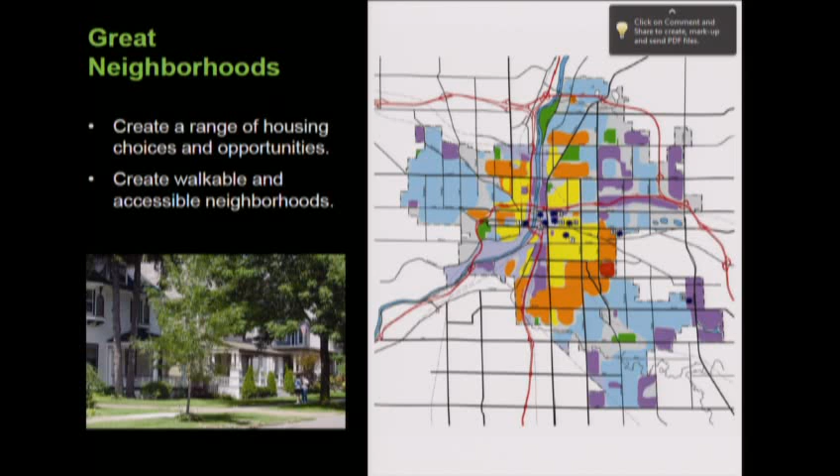So it's pretty interesting. Our plan is based off of 7 themes. Great neighborhoods is one of those. And I'm just going to flip through because the bullets at the bottom are basically a reiteration of smart growth principles. So great neighborhoods, vital business districts that we have a mix of land uses and strong sense of place.

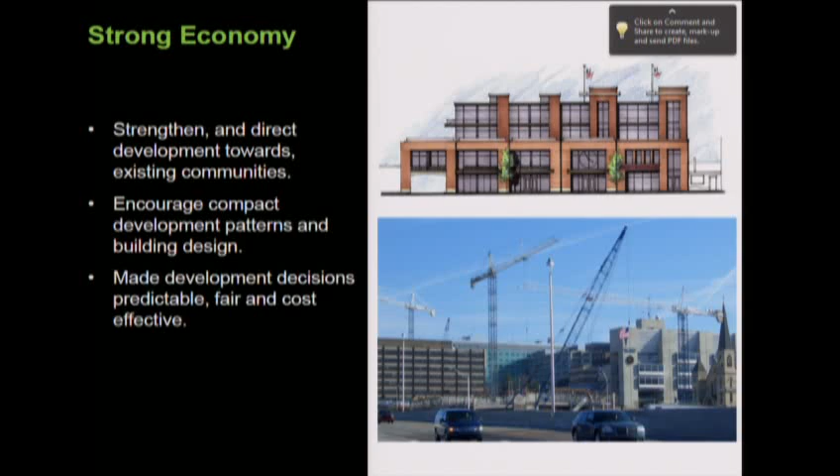Strong economy, and the strong economy is very interesting because you're trying to balance institutional and industrial growth with neighborhoods, and kind of how do you allow for that growth to happen and keep that quality of life that you want to maintain. Balanced transportation, again, that variety of transportation choices came out strongly whenever we've done any planning process.

A city that enriches our lives, so the quality of life piece is very important. City in balance with nature. And when we get further into development, we particularly talk about stormwater and how do you manage urban stormwater, because that is a huge issue.

And if you're into the green buildings, we talk about green roofs, or how do you do rain gardens, and you do that stormwater management. That's a huge piece in development that we have to continually address, and it can be very expensive for developers. And partnerships, again, that theme of working together.

Our future land use map is our basis for decision making when we look at kind of what the development patterns of the city should be. The red dots that you see on the map actually are transit-oriented development nodes. And we took the map from the Rapid, their whole bus map, and overlaid that with our land use map and identified key commercial areas and nodes so we know where to focus heavy development.

In particular, if you look at Division, where the new Silver Line is going to come, the bus rapid transit system, the BRT is going to be the first one in the state of Michigan. It started in 2014, where we actually have physical built stations that you pay before you board, and the platforms are built right up to where the bus will come right up, and you can roll your bike or stroller or wheelchair right onto the bus. All the doors open at once. The typical wait time at the station is 14 seconds, and they're off.

The neighborhood pattern book was a way that we looked at the community through years of development. When were these neighborhoods built, and what was the range that seemed to fit from, they were distinct enough we could create different zone districts out of. We actually ended up with 3 different neighborhood types, and that became the foundation of our zoning ordinance. So if you've already looked at the zoning ordinance, that's really how it happened.

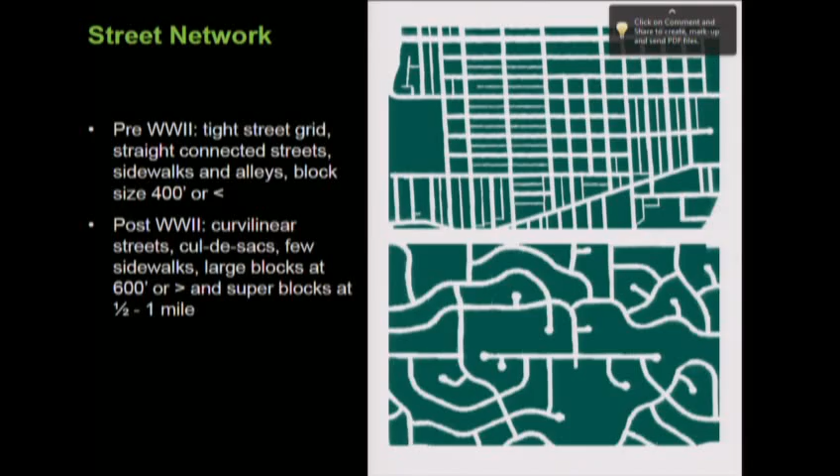Our street network really has 3 major street types, but the big 2 distinctions are pre-World War II and post-World War II. I can go on about streets all day, especially talking about sustainability, healthcare, and all the things that go wrong when you don't do streets right. But before World War II, we developed in a street grid pattern, with typical street block lengths of 400 feet - very predictable, very integrated. It was a whole network.

After World War II, we started to separate our land uses apart, build bigger roads, have them less connected. You saw more cul-de-sacs, to the point where a typical block length now to get around the block could be a half mile or a mile. If you're familiar with township development, built on those mile roads, you'll typically see a square mile with cul-de-sacs all coming in off of that, but all the traffic dumps onto one street. When you get further out of the city, you could close the S-curve downtown and nobody really knew where all the traffic went because it could disperse into the whole grid system - there's multiple ways to go. But if you did that to the East Beltline, where would the traffic go? There's not that connectivity, not that variety of choice in location and how to get there.

That has public health impacts actually, because you're forced to drive in this newer street pattern since you really can't connect to anything. You don't have any way to walk a block to get to something - you have to drive to get there. Actually, if you live in the more urban environment with the street grid, you're supposed to be 7 pounds less - little happy tip for all of you - because you're more likely to walk in a grid system than in a suburban road system. Fatalities are also less with that street type because your travel speeds are lower, and there's just a lot of different benefits.

From a land use pattern standpoint, the same thing applies. This is the same square mile - a traditional neighborhood on the left, that's the uptown neighborhood with Fulton, Cherry, and Wealthy. The other picture on the right is 44th Street.

You can see again this pattern of what we used to do, which is mix these land uses. The yellow is residential, the brown is multifamily, the red is commercial, the blue is office. You can see how walkable it is, maybe a 10 to 15 minute walk to get to a shop or restaurant in this traditional pattern, versus being out on 44th Street or further out, where you're walking a mile to get anywhere.

And you might, if you're lucky, have a sidewalk to be on. You usually don't see sidewalks in the newer forms of development. Because all the traffic pours onto one central street, your traffic volumes are exponentially higher. Instead of maybe 10,000 cars on a street, which is still busy in the city, you might see 25,000 cars. Then you need a bigger street, and you're not comfortable as a pedestrian being out there, so you're less likely to be out and about walking.

For residential development, we looked at building placement, setback, and the character of that development. Does it have porches? Where's the garage? That was a big issue for us, because in modern development you might see the garage at the front of the house, while in traditional neighborhoods the garage is in the back. So how do we regulate parking, and where does all of that fit?

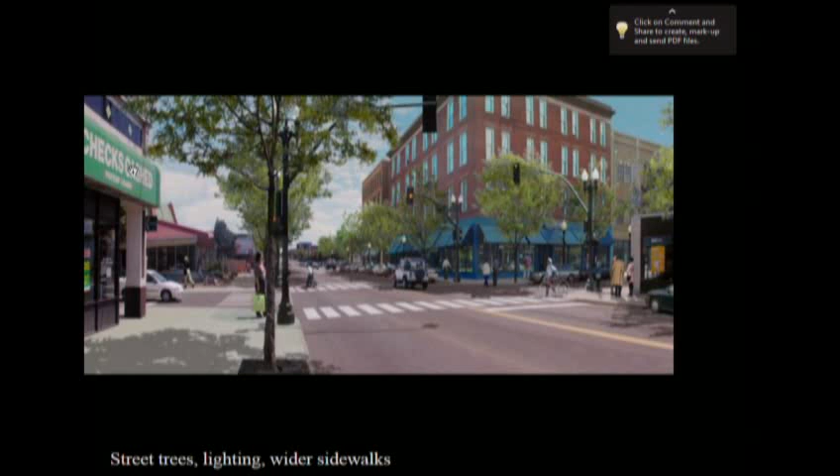So just really quickly: where do you place the building? How do you treat the street? How do you make this a place where people want to be, live, and enjoy commerce? You can fill in all those voids as you go through, and now you've created a completely different place. When we did the pattern book, that was really the vision set forth by the community, and that resulted in the zoning ordinance.

We took that foundation of smart growth and brought it into the zoning code. So how do we provide for a range of incomes so people have choices? How do we provide for a range of transportation types?

If you don't have a car—and a third of the population doesn't drive, an interesting little tidbit—too old, too young, disabled, by choice, or for legal reasons, you can't drive. A third of the population. What's interesting is that when seniors are surveyed about their biggest fears, the AARP has found it's not dying they're most afraid of, it's the loss of their car keys—that you're going to take away their mobility, they cannot connect to the community, they're stranded at home, they can't drive. So how do you provide for this range of transportation types?

How do you make sure you're being environmentally sound and managing stormwater properly? Those were the foundations of the zoning ordinance. We also followed LEED-ND, LEED for neighborhood development, which I'll talk about. The transit-oriented development I already mentioned with the red nodes corresponds with the Rapid's master plan.

We also use crime prevention through environmental design, where you can create physical spaces that automatically deter crime just by the way you build or place the building, or how you've defined those edges.

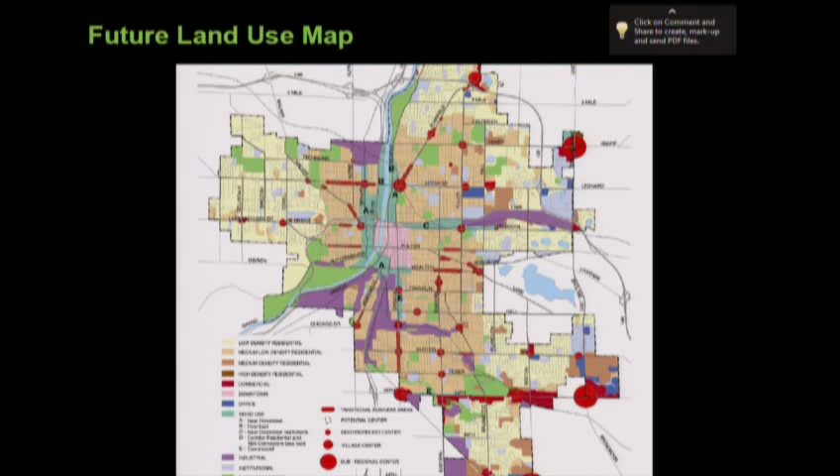I'll mention the future land use map again, because when you talk about smart location and linkage, how are we connecting and creating these nodes and making sure we're maintaining a street grid system so you have those connections? For design, when we talk about walkability and encouraging people to walk and get out of their cars, when you look at buildings like this with no windows, how comfortable are you really walking by that space versus a newer building with great windows?

I mentioned crime prevention through environmental design earlier, and there's this whole theory with CPTED - one of the key principles is surveillance. What 7-Eleven found when they kept getting held up as a party store is that if you have clear glass windows and feel like you might be watched - somebody could see you inside the store, or you could look out in the parking lot and somebody could see you - that it's a natural crime deterrent.

When you look at all the new development happening in Grand Rapids, be it the Walgreens at Michigan and Fuller, or Miss Tracy's on Franklin Street, or we're going to have another Walgreens over on Leonard, you'll see that we require 60% transparency, lots of glass on these buildings, because it's a natural deterrent for crime, but it also creates a much more walkable environment for pedestrians.

If you look at a shopping mall, for example, if you're at Woodland Mall walking from Sears to Penney's, imagine if half of those storefronts were all boarded up. Would you really walk from Sears to Penney's, or would you go to your car and drive around to the next location? You probably would drive. The same principle applies to urban environments - trying to keep the continuity, the storefronts, the street wall, so people are comfortable walking.

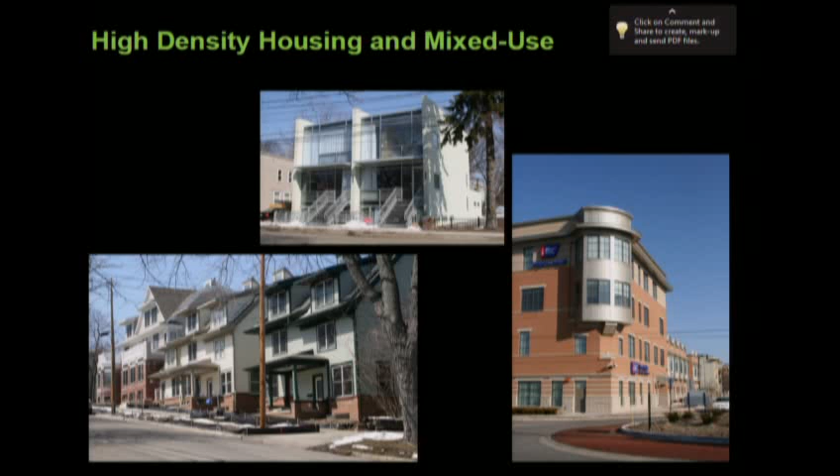You also have examples with the roundabout on the lower right-hand corner, St. Mary's Hope Lodge for people dealing with cancer. So we're seeing that pattern now developing. It's been really fun to have the zoning ordinance adopted, and 5 years later starting to see all the buildings coming in that are meeting the code.

We also have a new Subway being built on South Division, and a new Subway being built on West Fulton, where they're starting to put them at the street. The Riley's Ace Hardware on Michigan, and I mentioned the Walgreens - so you're starting to see how this pattern is developing, and as projects come in, big box stores, if they really want to be there, they will comply.

They're figuring out new models. Actually, the new Walgreens store we're going to have on Leonard - they're saying it's a new prototype for Walgreens to try to meet zoning ordinances similar to ours. So we're the first one. We thought that was kind of cool.

Ways in which we've kind of tried to reduce impervious surface to be more green. Parking is a huge issue, especially if you're talking about these seas of asphalt and parking lots. How do you incentivize less parking when you don't plan for Christmas peak twice a year, and the rest of the time half the parking lot's empty?

So our zoning ordinance actually has a maximum parking requirement. We typically end up waiving it. The Planning Commission hasn't quite gotten to the point where... most people we find are providing the parking they think they need, but they're also not being overly aggressive in how much parking they want to provide.

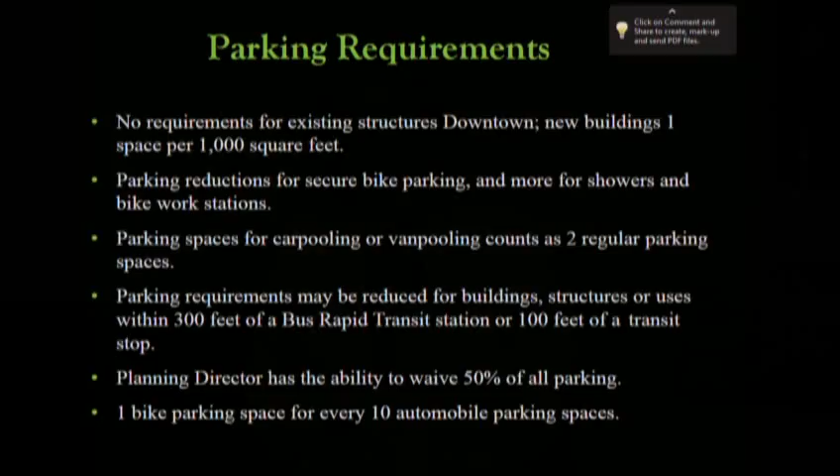I also have the ability as the planning director to waive parking, and the American Planning Association actually uses our ordinance as an example of the different things you can do. I can reduce parking requirements by half if there's transit nearby, if there's shared parking, if they provide additional bicycle parking, or on-street parking. There are different ways people can provide parking, and we're very flexible about that.

That's a big paradigm shift for a community to go through, because for years retailers were tied to this parking ratio, and so were community leaders who felt they had to provide this much parking. You may have followed the recent debate on Cherry Street about a new sushi restaurant going in with no parking being provided, and they're adding 75 more seats, so parking is already starting to get a little congested.

Should there be metered parking on the street? There's no municipal lot. Should we build one? The answer is going to be no.

But you want a healthy, vibrant community, and having people walk a block or two isn't going to kill them. At the same time, you've got to build a very walkable environment where they're comfortable doing it. If you go to downtown Chicago, before you know it you've walked two miles because it's such an engaging environment. How do you create that in a city the size of Grand Rapids, in our neighborhood business districts, so you can walk 3 or 4 blocks and not feel like it took forever? All of this ties together.

I mentioned the bike parking that we require. We also require—oh, this is cool, I can switch back and forth with the roller.

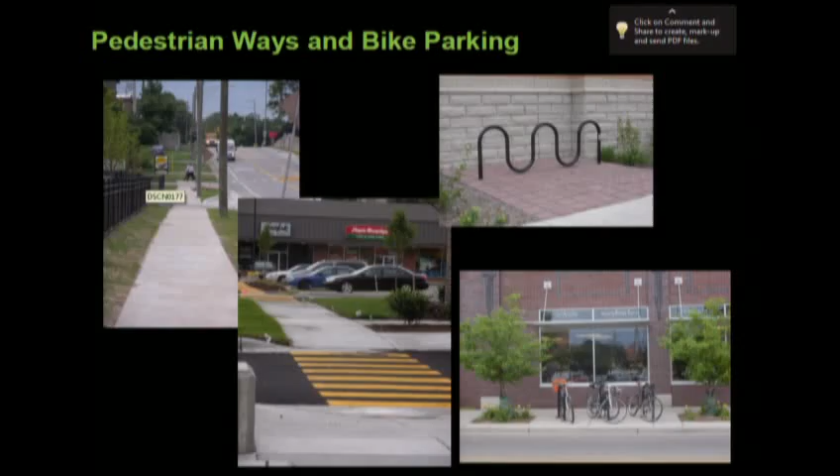The other piece, which you'll see more at Michigan and Fuller, Walgreens has it too, is the connection of the sidewalks. I mentioned people who are sight impaired, if they can't find the front door, how do you provide a path for them to safely cross a parking lot? So we require that all the connections, even if the building's not right at the street, connect to the public way, and that it's logical, fits, and is convenient for people.

For green requirements, we allow porous pavement for green space reductions. We took a different approach when we did the zoning code. Typical codes will have an impervious surface requirement, but pervious surfaces now can include porous asphalt or porous concrete, which isn't really green—it manages stormwater but isn't green. So to encourage people to change how they manage stormwater, we put a green space requirement in, not too aggressive that people feel they have to tear down the building next door to provide lawn, but enough that you can meet those requirements with porous asphalt, porous concrete, or a green roof.

We even allow contributions toward the Kent County biosolids facility—it's the plant that takes biosolids from the sewage treatment plant and repurposes them. They dry it out, use it as fertilizer on farmland, and buy easements on farmland to dispose of the biosolids. So we allow contributions into that to help fund acquisition of those easements, and you can get credits through that.

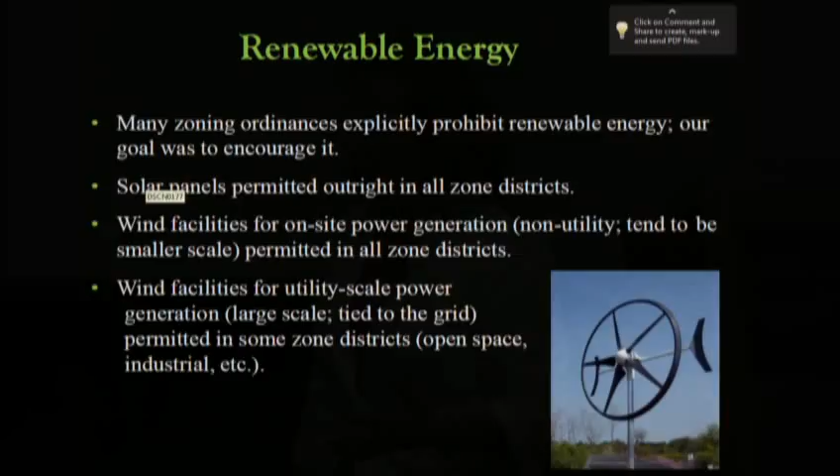For renewable energy, we allow solar panels and smaller wind turbines. We looked for opportunities to allow larger wind facilities in the city, predominantly in industrial areas. There are a lot of considerations with those larger facilities, everything from shadow flicker to noise to how you manage that, but we've opened up that opportunity in our zoning code so we can do more alternative energy.

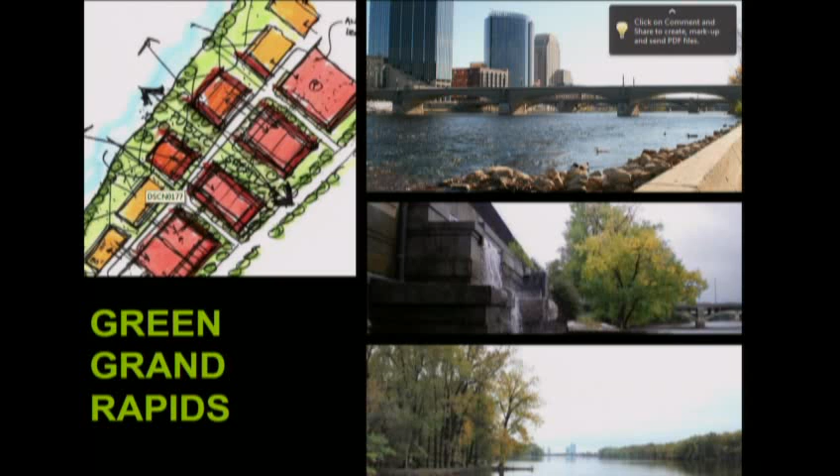I wanted to highlight what we've been doing in Grand Rapids because this was an update to the master plan. I mentioned the three themes, or you saw the seven themes, but the three we focused on heavily in Grand Rapids were balanced transportation, a city that enriches our lives related to quality of life, and a city in balance with nature related to natural features.

A lot of this planning, starting in 2007, resulted from different pressures. The city has historically had a partnership with Grand Rapids Public Schools allowing us to share facilities—a joint use of facilities agreement. GRPS, as they've been downsizing, have been trying to dispose of their properties. In most of our neighborhoods the parkland is owned by the school—25% of our parkland is under GRPS ownership. As they dispose of that property, it substantially affects quality of life in our neighborhoods.

You may have heard of the partnership the city has been doing with Ojibwe Development for Eastern and Lexington schools. Oakdale had an interesting twist—we're working with the charter school there to preserve an acre of land as public park, which they're actually donating to the city so it's in public ownership, which is great. I mentioned the emerald ash borer, and we were also getting a ton of requests for bike lanes—everywhere you go, everybody wanted bike lanes.

That was the number one vote getter when we went through the process.

Stormwater management, as I mentioned, but also shrinking city resources. How do we ensure quality of life for our citizens, but we have to do it in a different way. We can't subsidize our Parks Department anymore. The budget for the Parks Department has been cut by two-thirds. So how do you still provide a high quality of life for citizens when you don't have a lot of resources, and how do we creatively think about that?

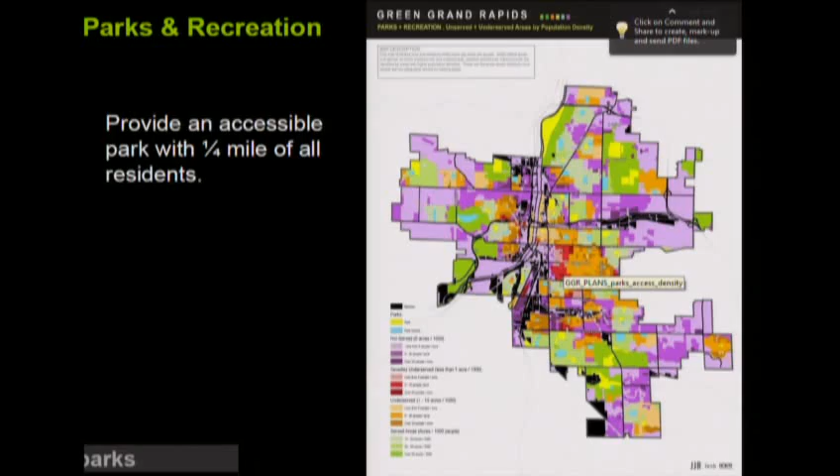We also have other locations like this big red area, which is the south end of Heritage Hill. What we found there is the corner at Madison and Pleasant, the city was able to, through a land swap, acquire two acres of land, which is right now a two-acre parking lot. The impact on the quality of life in that neighborhood to turn a two-acre parking lot into a green space will be huge.

We actually planned that park with the neighborhood, and it was somewhat surprising to me because you'd think everybody would want everything loaded into the park. Instead they said, all we want is a small playground and field. We just want a place to throw a ball or play soccer, because we don't have that since it's a dense neighborhood. Those stories have been very interesting for us to see how people perceive their green spaces and what's important to them.

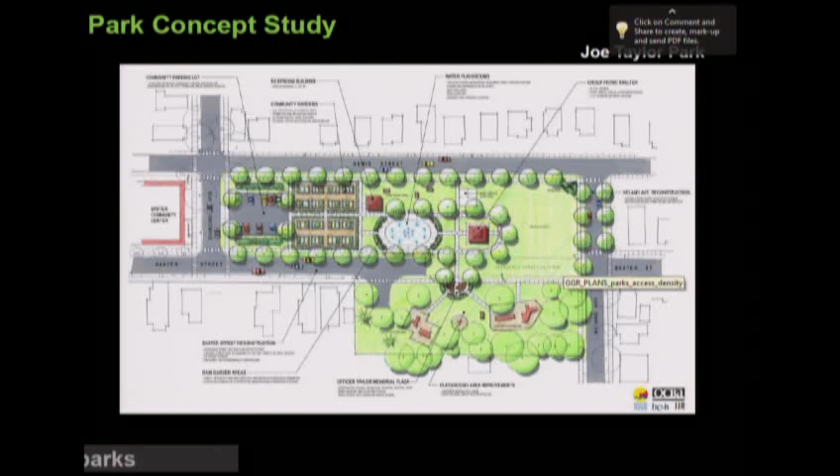This is the Joe Taylor Park example. I forgot I had put this in, but the area to the right is where the underground infiltration or retention system is. We don't have the community gardens in there yet, but everything else has been constructed, and this is the first full summer it'll be open. The water playground is great because you'll see 50 kids out there all day long and afterwards.

Another theme was the greening theme, and you'll frequently hear this 40% tree canopy goal that was really identified through the process. It's based on American Forests' recommendation on what you should be as a city. It's a pretty high target. Grand Rapids is about 36.4% right now, so it doesn't seem like we're that far off from 40%, but that means it's 185,000 trees. So there's a lot of work.

Total, we need to plant 185,000 trees to get from 36 to 40%. So we have a lot of work to do, and the challenge is we can't do all of that. We can't plant 185,000 trees on public land. We just don't have, between the parkland and the street rights of way, only so much space. So how do we do this work in partnership with citizens to get people to love trees and want to plant trees?

Trees are really important from a stormwater management standpoint, from a cooling standpoint, especially if you're looking at high heat days. Everybody talks about global warming and whether or not it's really happening, but when you talk to public health experts and they're watching the number of high heat days when they occur, there's a correlation between high heat days and stress on vulnerable populations — the elderly, low income, people who can't afford air conditioning — and whether or not there's tree canopy there.

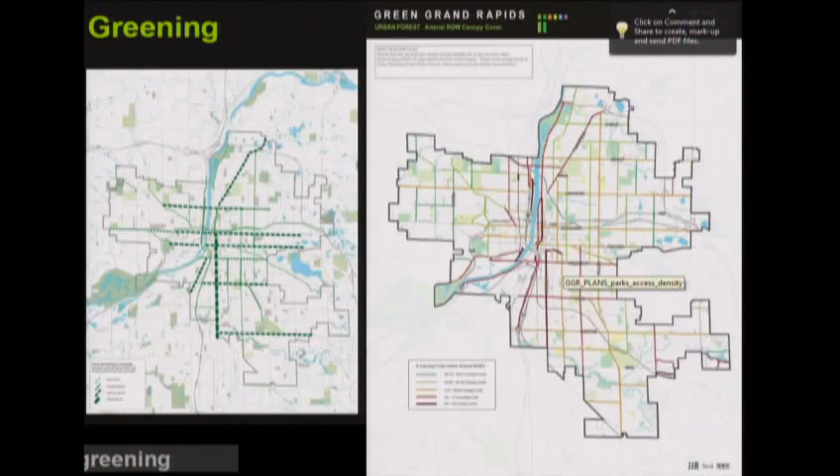The map on the right, we had partnered with Grand Valley's Water Resources Institute to do the full tree canopy analysis, so we knew what percent we had where and by neighborhood. We asked them to pull out public rights of way to understand what trees we need to plant where on what streets. And when you compare the two maps, they're quite close.

Citizens intuitively know what we need where. It was a really good lesson for us — we knew that already from doing the master plan, but it was kind of a validation that people intuitively know their community. They know what's important and what should happen. It's just how do you give them the tools to be able to make it real.

Connections — the whole theme of bike lanes again came up in complete streets. That whole range of transportation choices we want to provide to people, that they can ride transit, they can walk, they can bike, and go by car. You also have to plan for freight, for truck traffic. But how do you go about doing that?

Burton is going to be the latest one that we do. Division, if you're familiar with Division, we've been doing that. I've got a picture of Division that we just recently put on a road diet in partnership with the Michigan Department of Transportation. And now the Federal Highway Administration is really pushing for road diets because of the safety data that's coming out.

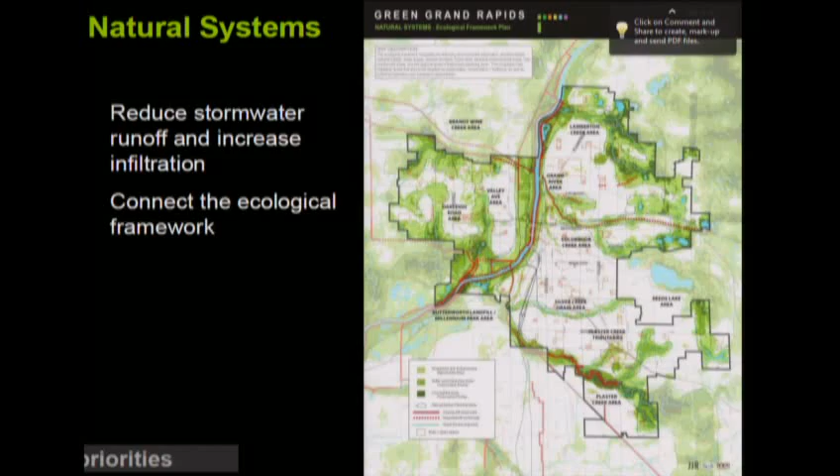Natural systems, the stormwater impact - the goal is to catch the stormwater where it falls. And that leads to green roofs, rain gardens, and retention swales and all those other things to try to manage the stormwater, because the stormwater infrastructure costs millions of dollars and it affects the water quality of the Grand River. It all eventually goes into the Grand River. We have one of the top 10 urban fisheries in the country when you look at steelhead. And there's just lots of opportunity to make sure that water quality is really important to the community.

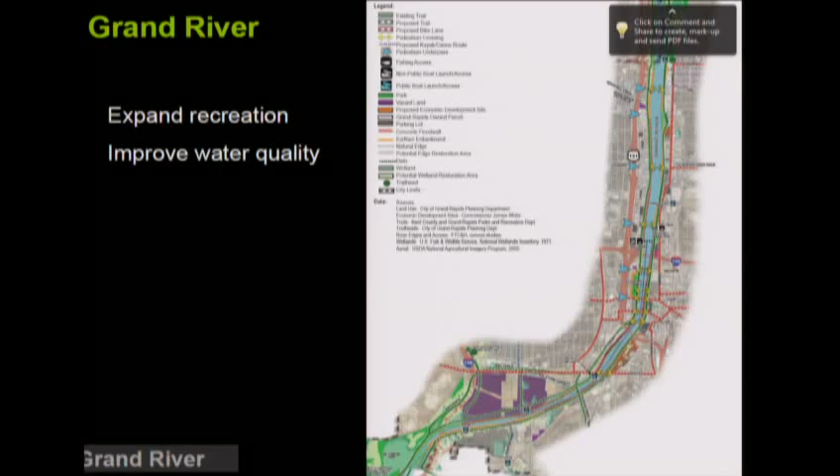The Grand River, we really focused on what could happen. As I mentioned, we said we're not going to have restaurants right at the riverfront on the water when you've got big flood walls and changing elevations of the water. But really, as a recreation opportunity, the Grand River has a ton to offer.

We have water skiing and rowing north over by Riverside Park. And in fact, when the Olympics was considering whether or not they should come to Chicago, we were actually getting phone calls from other countries that wanted to come and practice on the Grand River in preparation for the Olympics. So it's a good river for rowing.

But then we also, as I mentioned, the fishery is fabulous. And historically, the Grand River was a great river for sturgeon. So how do we kind of restore that habitat? What do we do with those dams? And how do we improve the connections between it?

The Grand River in downtown Grand Rapids has a great opportunity to be the hub of the West Michigan region - to connect to Muskegon via the Musketawa Trail, to go north up to Cadillac via the White Pine Trail, which actually connects already down to Riverside Park. If you go out to Wealthy Street, you can connect to Kent Trails and Millennium Park. If you go south, can you connect to Plaster Creek Trail and Thornapple Trail? So as a regional trail system, we have these missing pieces yet to fill, but there's some wonderful opportunities to connect.

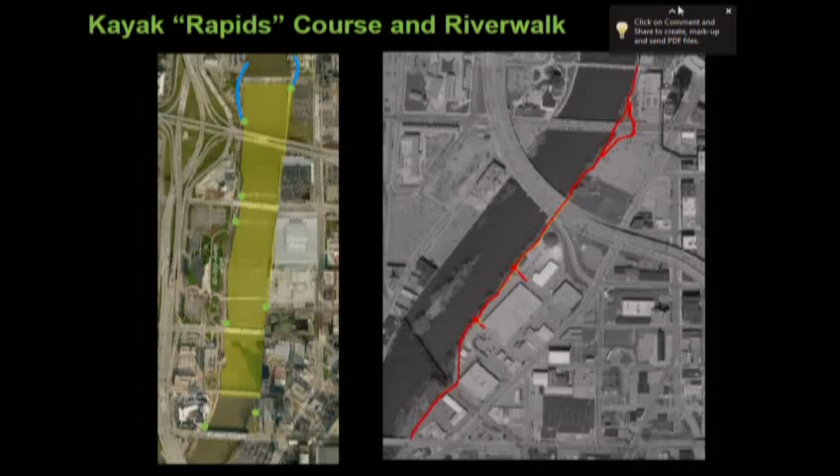And so what we did during Green Grand Rapids is we looked at how do you provide those connections. The picture on the right shows the trail path that we examined. Can you get under the Fulton Street Bridge? Can you get under the 131 bridge given flood levels and the heights of the bridge abutments, and how do you make that work? We examined that.

We also looked at, can you provide a kayak course in the Grand River? And this work actually has resulted in a new nonprofit being created, the Grand Rapids Whitewater, and Grand Rapids Whitewater received funding from the Downtown Development Authority and Founders Brewing Company to hire an expert to evaluate the river and its hydrology and the river bottom - actually map the whole river bottom - and to also look at sedimentation and whether or not there was any contamination from the industrial processes upriver that might result in being an impediment to redeveloping the river. What they found is that there's no contamination in the river, in the sediment, which is great news.

And they also, I mentioned the sturgeon habitat, found that north of the 6th Street Dam, there are these land shelves that are fabulous for sturgeon habitat. We just need to find a way to be able to get the fish up there.

So there's a whole discussion about what to do with the dams. They're developing plans to naturalize the river, maybe take out some of the low-head dams or reduce them. The low-head dams are actually quite dangerous—if you get caught in that churn, it can be fatal. In fact, the expert they're working with said these are some of the most unsafe dams he's ever seen.

So how do we improve the safety of the river? How do we preserve the natural habitat and enhance it, along with the recreational qualities we've got? That's going through examination right now, and this year we'll be hearing a report about whether or not that's feasible.